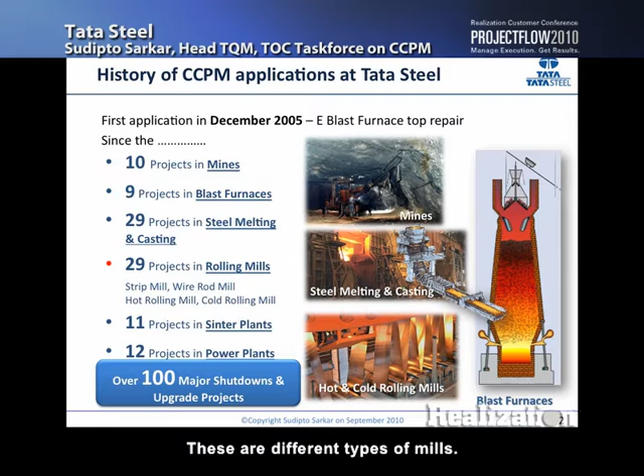These are different types of mills: 11 projects in sinter plant, 12 projects in power plants, over 100 major shutdowns or turnaround projects in the last 5 years. Now let me just give you a project brief on what this project is all about, that I'm going to drill down further.

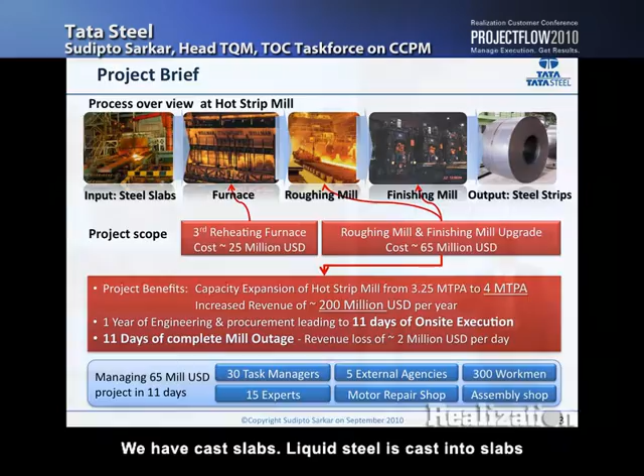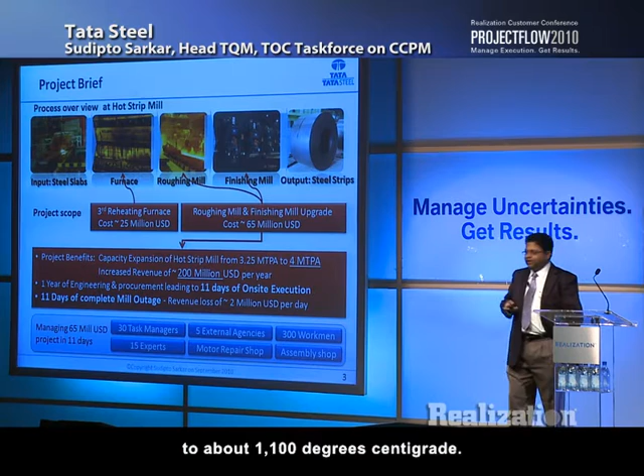This is the mill that we are talking about. We have cast slabs. Liquid steel is cast into slabs of 210 millimeter thickness and about 1 to 1.5 meters wide, 11 meters long. These are then heated in a reheating furnace to about 1100 degrees centigrade, that's about 2000 Fahrenheit. Then they're rolled into something called a roughing mill, where 210 millimeter thickness is brought down to 30 millimeter thickness.

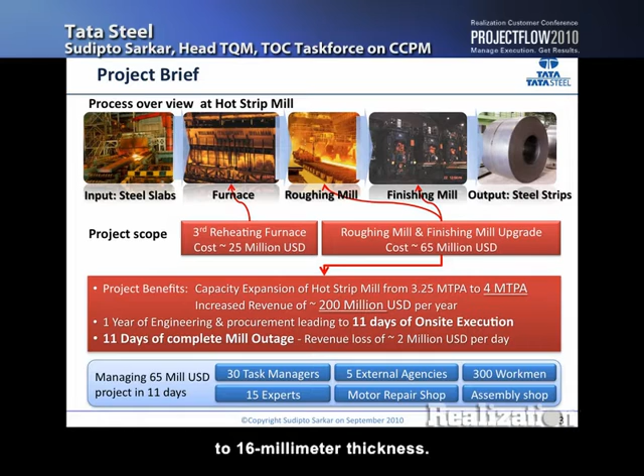And then there's this finishing mill, which is a continuous mill. There are 6 stands, and this 30 millimeter thick plate is reduced to anything between 1.6 millimeter to 16 millimeter thickness. This whole operation happens for a particular slab in 1.5 minutes. And this is the final product that we are talking about.

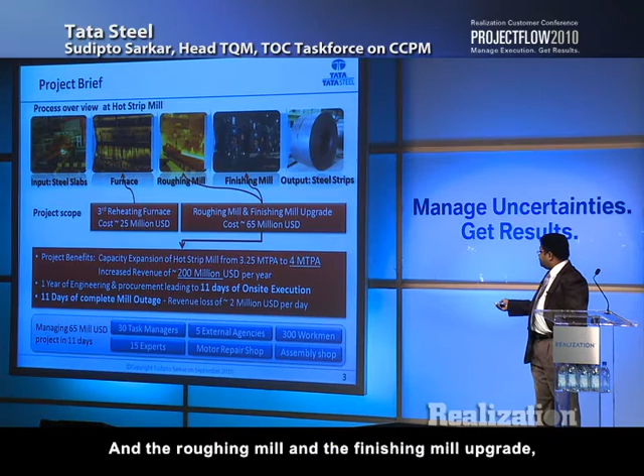The project we are talking about, that I'm going to elaborate on, is a project worth about 90 million US dollars, out of which we already have 2 reheating furnaces. We would be putting a 3rd reheating furnace, and the roughing mill and finishing mill upgrade, which costs about 65 million US dollars.

Now this requires about 1 year of preparation, followed by 11 days of execution in the field, where the current plant would not be producing anymore for 11 days.

And by doing this, we would increase our output from 3.25 million tons per annum to 4 million tons per annum. A 0.75 million tons per annum increase results in about $200 million per year of revenue.

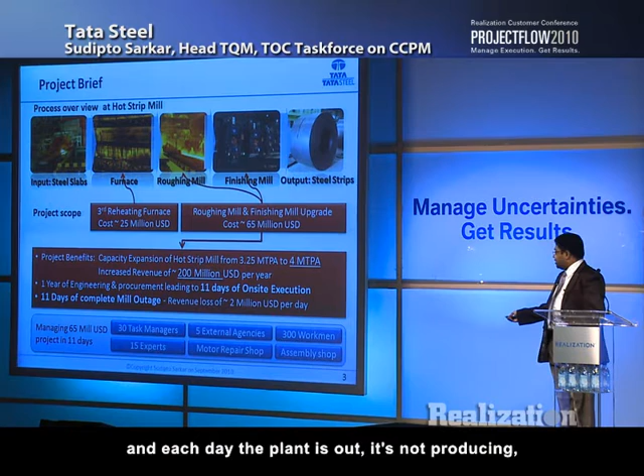And each day the plant is out, not producing, we lose $2 million US per day. Before this, we were producing around 10,000 tons per day out of this plant. We would be producing 12,000 tons after this.

So what was needed in this project was $65 million US getting installed in 11 days, 30 task managers, 5 external agencies, 300 workmen, 4 different countries, 15 experts, and some internal shops like the assembly shop and motor repair shop and so on and so forth.

Now, just to give you an idea about Tata Steel hot strip mill and the group, the Tata Steel group is a 140 year old group with a turnover of about $70 billion right now. The Tata Group is into everything from cosmetics to steel to mines to automobiles and so forth. The Tata Steel Group is the 8th largest steel producer in the world with a turnover of $33 billion.

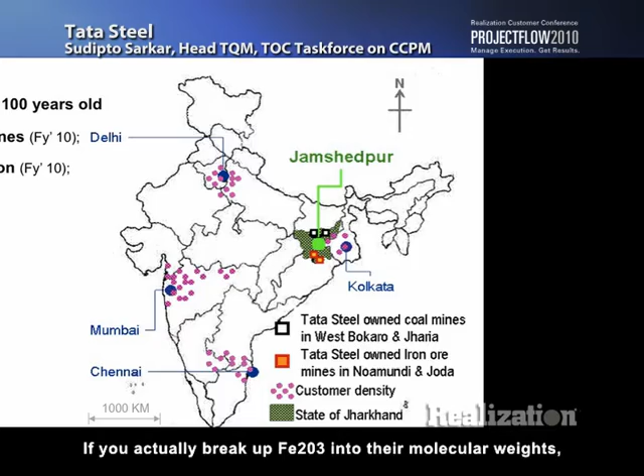Now, where I come from is Tata Steel India, located in a place called Jamshedpur in the eastern part of India. This part has probably some of the richest iron ores available in the world. It's literally pure iron ore, with 67% iron content. If you break up Fe2O3 into its molecular weights, you would get about 67% iron, and that's what we have over here. So a very beautiful place to have a steel plant.

And of course, the other thing required in a steel plant is coal. So we have coal mines all over this place, and iron ore mines all over this place, very close to each other. Our last year's turnover was about $6 billion. We own our own raw materials, and we are famous for corporate social responsibility.

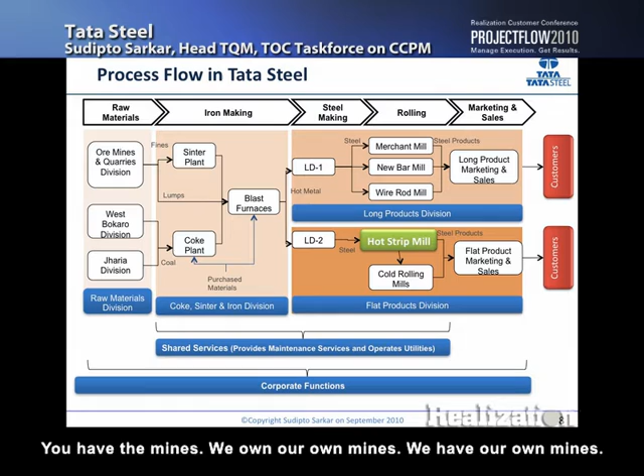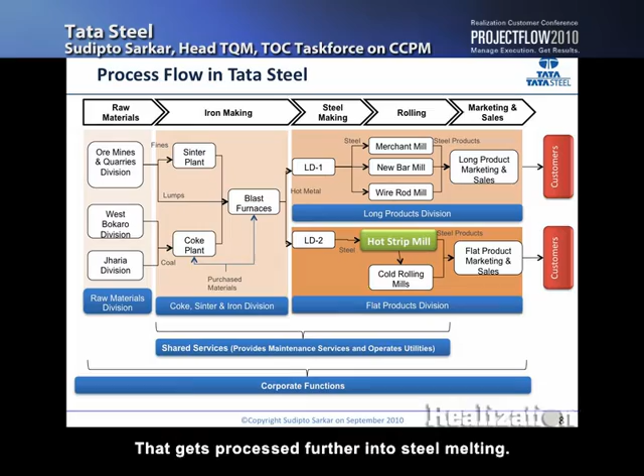Now, this is the process flow at Tata Steel. You have the mines, we own our own mines. That gets produced through different processes through the blast furnace into something called hot metal, which is more of a cast iron. That gets processed further into steel melting, that's LD1 and LD2, which gets further rolled into different shapes. And this is the mill that we are talking about, where this particular case was implemented.

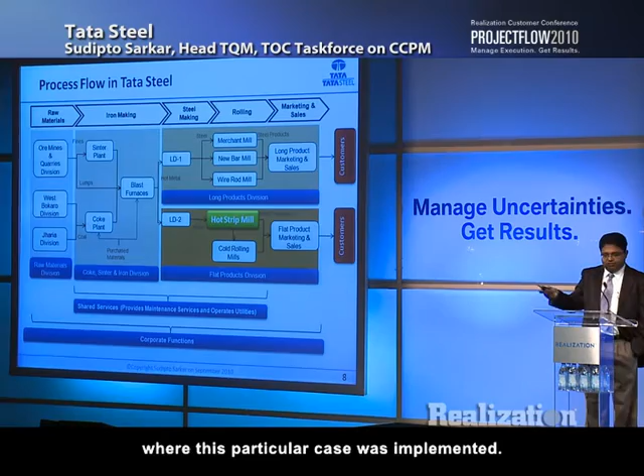Right now, to talk about the mill, we are talking of 2 furnaces, reheating furnaces. The input is 210 millimeter slabs, and the output is 1.6 to 16 millimeter thick sheets. We have 2 reheating furnaces. This $90 million expansion would result in a 3rd reheating furnace.

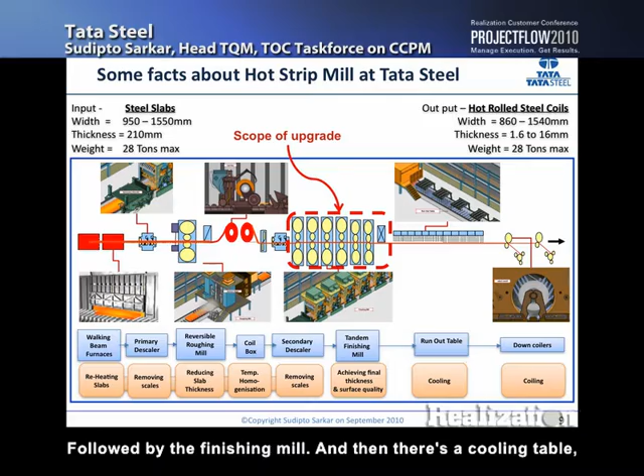This is the roughing mill over here, in between... followed by the finishing mill, and then there's a cooling table, and then there are coilers where the material gets the coil form.

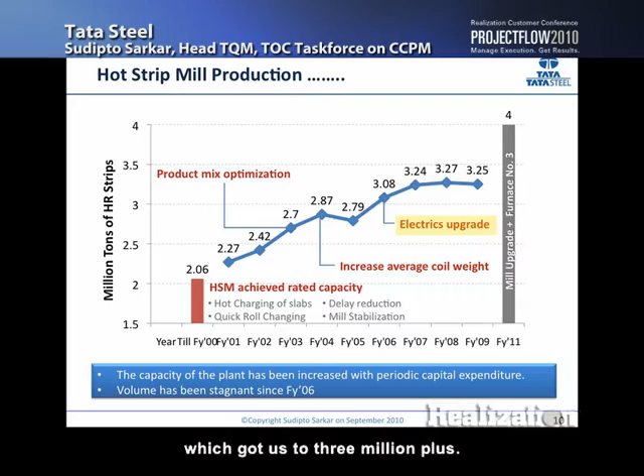Now, in the past, when this mill started, it was a 1 million ton mill per annum. We improved it to about 2 million tons, and then there was gradual improvement by product mix, by increasing average coil weight, and we got it up to 2.87. Then we had this electric upgrade, which got us to 3 million plus. Now, when this electric upgrade happened, that was the first year we had applied the critical chain in this plant. And then it remained stable at around 3.27 million tons, and with this investment, it would go up to 4 million tons.

But there are a lot of socio-political reasons for which a greenfield expansion is very difficult. So a brownfield expansion is much easier. It made a lot of sense to increase the capacity of this mill rather than put up a greenfield expansion. Now, this shutdown would take 11 days for this upgradation to happen, and the throughput loss would be around $2 million per day. So if I can manage to save 1 day, that's $2 million for the company.

In order to fulfill the annual business plan of production, there's a measurement for all these mills known as net operating hours, or availability. We needed an availability of 6,778 hours for the entire year. This could be achieved, and there are regular periodic stoppages of the mill that's necessary. One of the things that would help us achieve it is 9 days of shutdown.

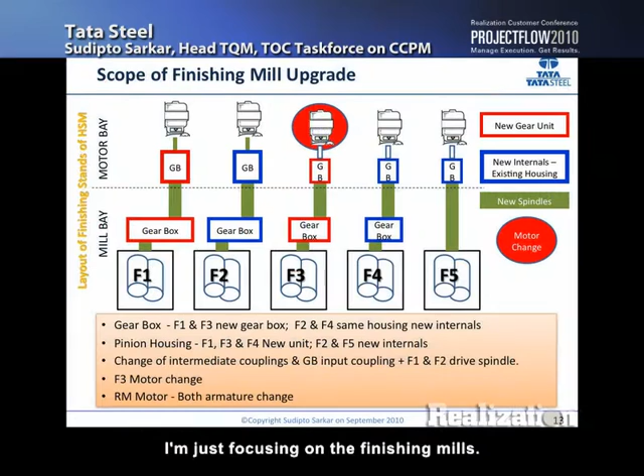What was the scope of shutdown? I am just focusing on the finishing mills. I have shown just 5 stands over here because that is where the changes happen. The 6th stand did not have any changes.

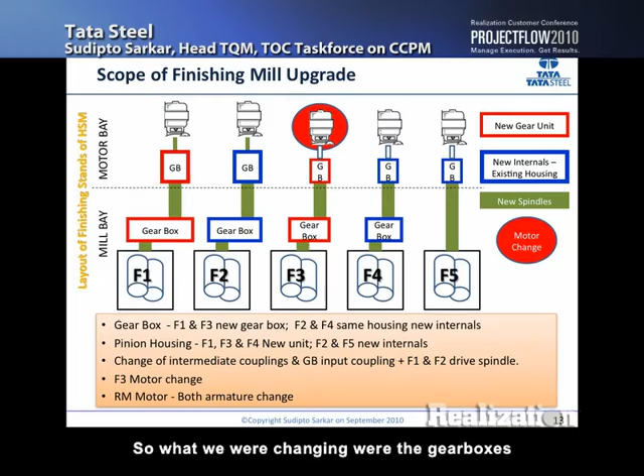So what we were changing were the gearboxes and the F3 motor, and there were a lot of dependencies within this. I will talk about the dependencies as we go along. Now when I talk of these gearboxes, each one of them weigh about 45 tons, so you just can't pick them up and take them somewhere and then put a new one in.

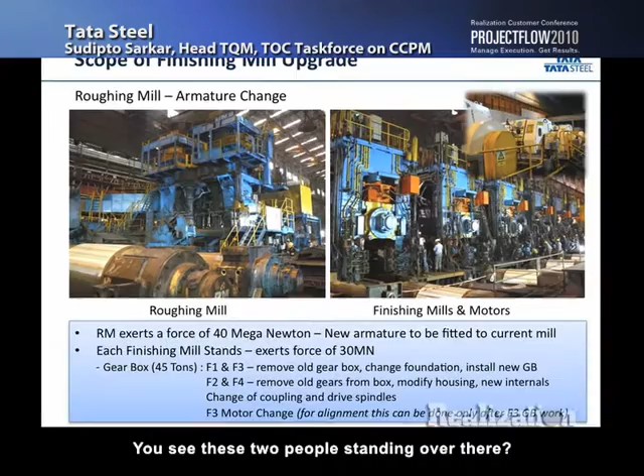Just to give you an idea of scale of things, the roughing mill that we are talking about - you see these 2 people standing over there, and that's the size of the mill. This is the mill part. To support these, the drive part is behind a wall, and that had to be taken apart and sent back, some to repair shop and others to just take it away and put back new stuff into it. And these are the finishing mills that we are talking about, and these are some of the motors.

These mills require to exert a load of about 40 meganewtons. The motors driving them put together require something like 30 megawatts of power when they run. The city that I belong to, Jamshedpur, consumes somewhere around 550 megawatts in all, including all other industries - there's lots of industry over there. All our industries put together is around 550 megawatts, and these few mills put together consume about 10% of the whole power. So that's the size we are talking about over here.

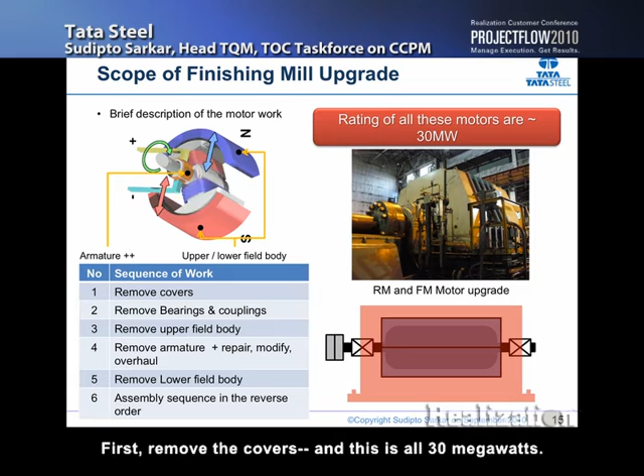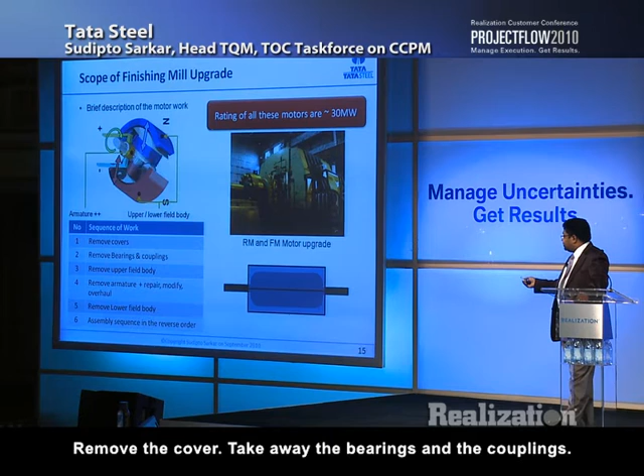In terms of motor change, what are we looking at? First remove the covers, and this is all of 30 megawatts, so the entire weight is about 60 tons for this motor. Remove the cover, take away the bearings and the couplings, take away the field bodies, and then the armature, and then put them back again.

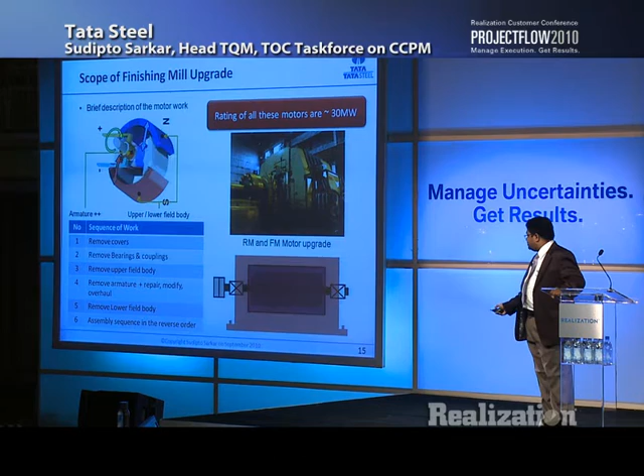And this had to be done in 65 hours. Why in 65 hours? I will talk about it as we go along.

So what does the thing stand like? The motor part was being done by Teco Westinghouse from Britain. The gearbox part was being done by SMS Demag - people who are very common contractors or suppliers to steel plants - in Germany. And the automation level was being done by Converteam of the US. So you had different countries, and getting all of them together was a big problem.

Now when the plans got made, people thought this is the way the project would happen, and this would take 11 days. Obviously in this there is commissioning of 54 hours. Now you really do not know what is going to happen during commissioning, you can't really predict that, so you can't do much about it. So this is gone.

When we got the people together, Teco Westinghouse and SMSD, we realized that this job can only happen after this, otherwise there would be major alignment issues. So 11 days, no way. Now this is where it comes in - in order to get it to 11 days, the only way we can do it is if the motor work can be completed in 65 hours. Then we can bring it back. So if you take that out, then all that we are left with is uncertainty.

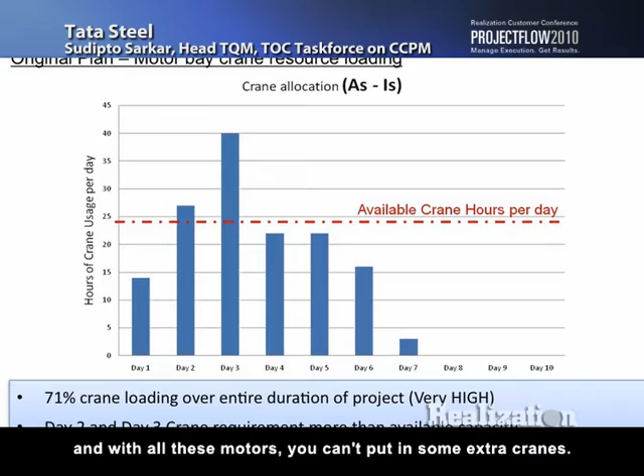That's one dependency, and the other one was - the entire place where all these motors are there is a room of about this size, maybe twice the length, and you have all these motors, and with all these motors you can't put in some extra cranes. There's only one EOT crane in the motor bay on top. Now this crane had a load distribution in terms of loading like this. Obviously it gets booked for 7 days, but in between there are days where you need twice the crane capacity.

Now, this was a big issue, and there wasn't enough space to actually get in another crane. And we are not talking here of small size cranes, we are talking of cranes which can take in 50 to 60 tons of weight. So mobile cranes really can't get into that space.

And for this shutdown to be up, the last part of this pipeline was connecting it to some of the lines of our current furnace. So unless that connection is made, there's no way that we can start the current furnace's operation. And if that doesn't happen, it doesn't matter whether the mill starts or not, anyway the plant can't start, because you need the furnace slabs to be heated.

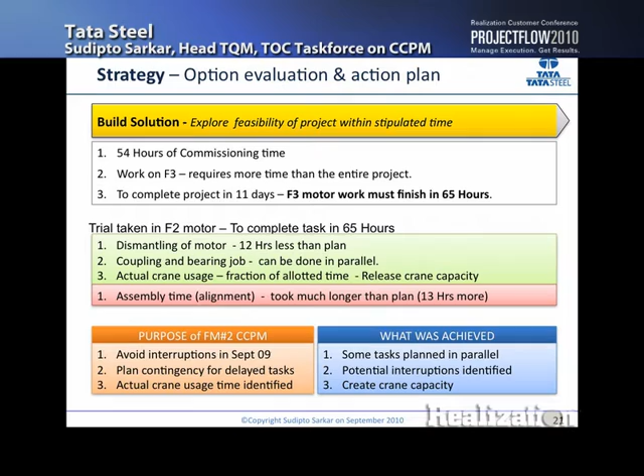So what strategy did we evaluate and adopt? The first thing was to evaluate whether this project is actually feasible in 11 days. For that, we had to change the F3 motor during shutdown, but then we also had to change the F2 motor at some point of time. So this was a good opportunity. We took up the F2 motor and wanted to check whether it could actually be replaced in 65 hours.

Dismantling took much less than what we had estimated, but then alignment and all took much more than what we had estimated. All put together, we could understand where the pitfalls are, what are the areas where we can get stuck, and there were obviously actions taken to prevent it from happening.

The other was crane as a resource. Now, my experience says that you might say, okay, at the end of the day, it's 71% of the total duration, but then during commissioning, anyway, you don't need the crane, so that goes off. But even at 71% of any resource capacity booking, it's very, very high to manage.

So what we did was we staggered the crane usage in such a way that we could evenly distribute it. We first did an early start, early finish -- that's what you saw in the previous graph. We looked at late start, late finish, and we realized that there was day 4 where there was very little crane usage. So we managed to stagger some tasks into that area.

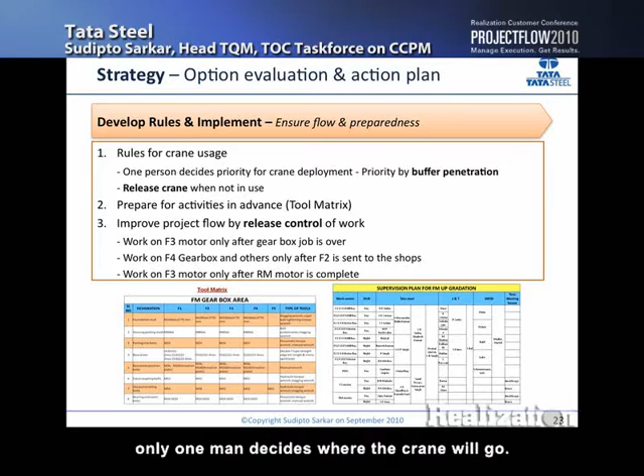Then the big one, that we had to change the rules. Now, in terms of crane usage, the rule that we put in place is only one man decides where the crane will go. Now, that was not too difficult.

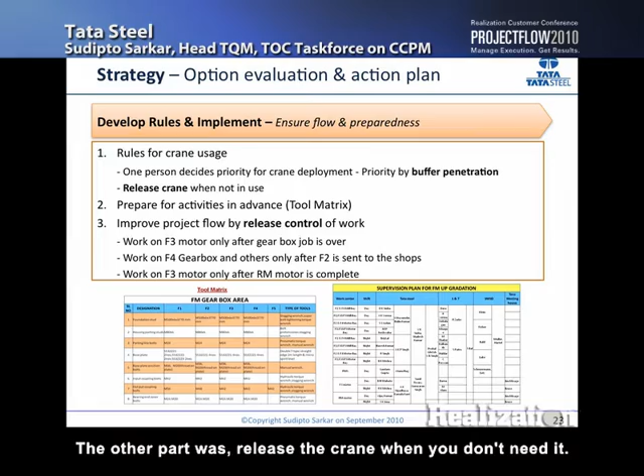The other part was release the crane when you don't need it. Now, we had to go to the extent of creating certain punishments for people -- if I have the crane and I am not using it, then I am in trouble. So, if I am not using it, leave it. Doesn't matter if it's idle, but leave it. Just don't keep the crane to yourself.

The other part was the tool matrix that you see over here. And of course, in terms of the supervision plan, it was 24/7 working. So, accordingly, the supervision plan was worked out. The other part, of course, the last was release control of work.

Now, as Dave also said, for all technicians and mechanics, you give them a screwdriver and a spanner and they will find something to open and close back again. Now, that's very true all over the world. Now, this release control is a difficult thing to implement. In fact, I think that's the most difficult thing to implement while implementing critical chain.

Now, one thing, the rules were simple. F3 motor work would only start once F3 gearbox is over. If F3 gearbox is not over, then F3 motor can't start. If people are sitting idle, they are sitting idle.

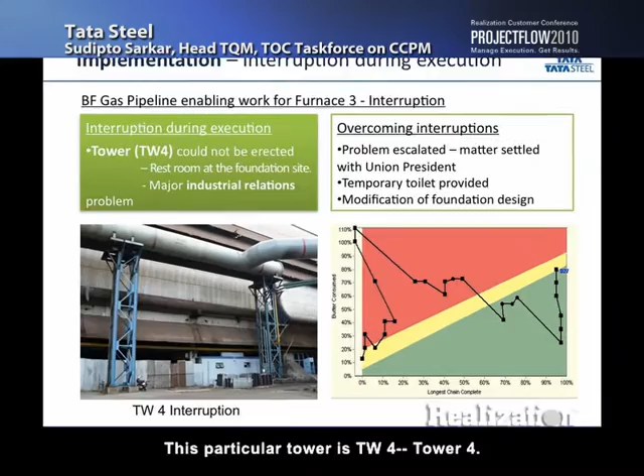The third place where we had a major interruption was, and we had no clue about this. I mean, this project was not even in the focus. This pipeline at this point over here, this particular tower is TW4, tower 4. Now, when we were monitoring this project, after 1 or 2 days, we realized that at tower 4 the job is stuck.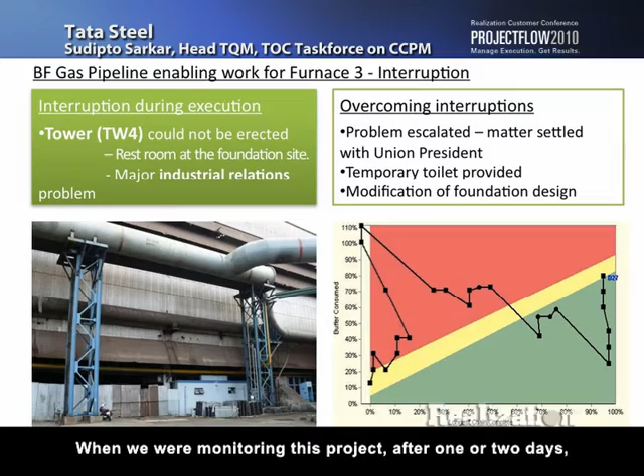Whenever we asked these people what happened to tower 4, they would say, tower 6 is ready, 10 is ready, 8 is ready, everything is ready, so why are you worried about tower 4? Day 1 that happened, fine. Day 2, exactly the same thing happened, they were not ready to talk about tower 4, but ready to talk about everything else, where the progress was very good.

At the end of the review meeting, I asked the chief of this hot strip mill, why don't we just take a walk and see why tower 4 is stuck? We went there, and both of us started laughing, because there was this workers' restroom right at the place where the foundation was supposed to be built. This has got shifted now. Tinkering around with restrooms is a major industrial relations problem.

We realized that, and the other part was, there was a shop over here, so the line had to bend. We couldn't bend it too much, because gas flows and liquid fluid flows are very complex subjects that designers don't want to talk about.

So we immediately escalated the matter right up to the president of the workers' union. We went to him and said, look here, this is the story. Just give us some time, we'll make a temporary arrangement, and we'll shift the toilets.

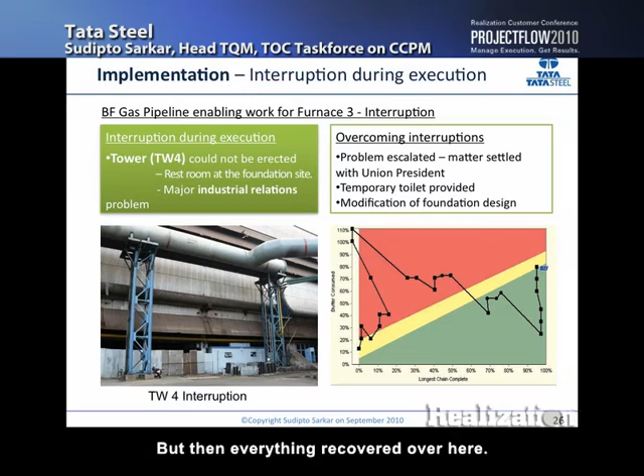But then everything recovered. Don't worry about this vertical line. Towards the end, they were actually ahead of the finishing mill project, so they had to wait just to make those final connections to the current furnaces.

In terms of results, the biggest satisfaction we derive from implementing critical chain is in most of these organizations where you have operations staff and maintenance staff, and if engineering staff comes in, then it's a real mess. They spend more time fighting rather than doing projects.

One good thing that happened about implementing critical chain in all projects in Tata Steel was that there was major harmony among the entire team, and for the whole team, it was the project that was important, not individual groups.

The other big gain we have seen in implementing critical chain in Tata Steel is - in the 5 years of critical chain implementation, it's very difficult to make a correlation, but the fact is, steel plants are pretty infamous for fatality. All over the world, it's like that.

So we have DuPont as a consultant on industrial safety for us, grooming us on safe practices as well. Recently, one of these DuPont consultants made a comment: I don't know what you all are doing with these shutdowns - 5 years, so many shutdowns across the plant, not one fatality, not one accident. You all must be doing something good.

As a result, last year we finished at 3.65 million tons. This year we will finish at around 3.87 million tons, and next year we will cross 4 million tons. In terms of NOH, net operating hours or availability, these are the benchmark levels, and we are at 6690 last year - slightly better than, we didn't achieve our target, but we are slightly better than the best in the world. In terms of savings, those 2 days saved us $4 million.